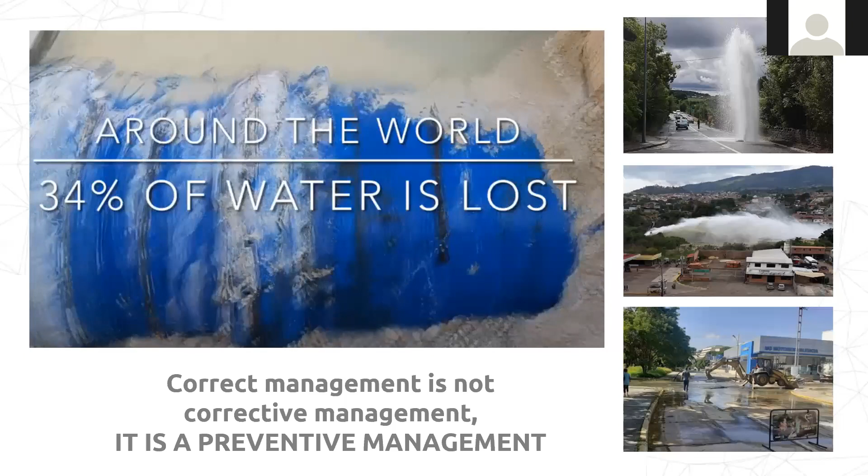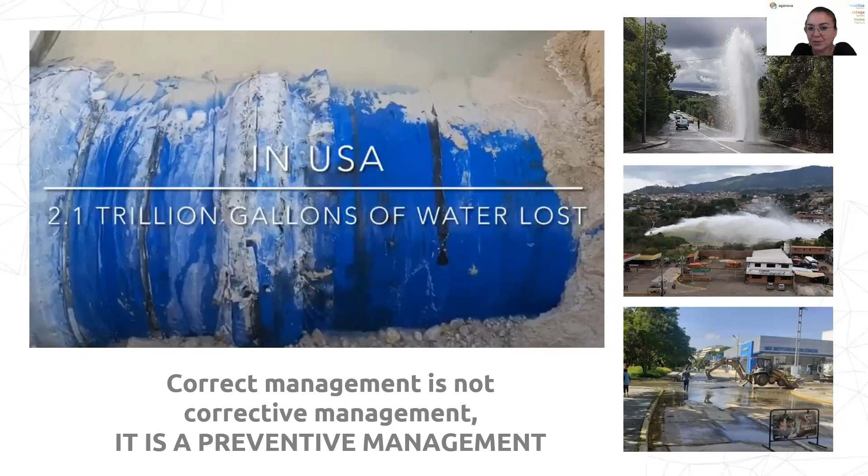Okay, I think this slide is not really necessary for all of you because you are leak detection specialists, but I always like to introduce my presentation explaining that when we speak with clients, they always evaluate leaks as per the quantity of water that we are losing. But the amount of water we are losing through leaks is one of the minimum risks of a leak.

There are a lot of consequences from not having a correct management of the pipeline, of the assets. Because one leak is the beginning of a problem, but then a leak could cause major problems such as damages of the pipeline, service cuts. So it is very important for our company to let the sector know that correct management is preventive management, not corrective management.

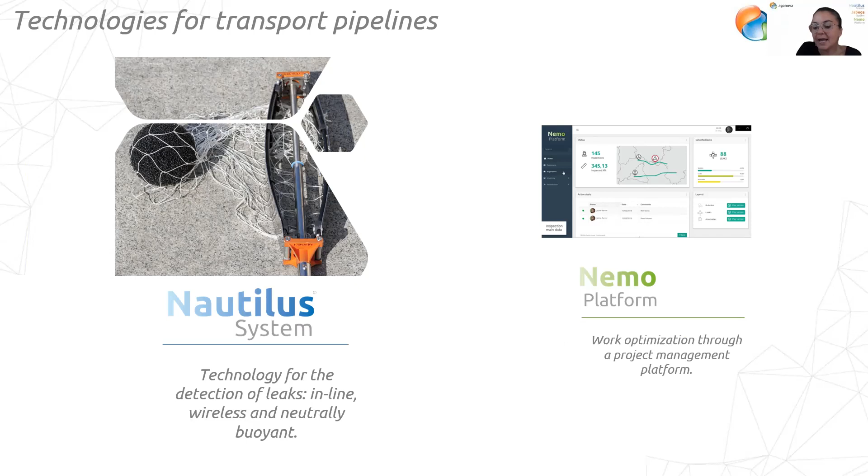Today, I'm going to introduce you the Nautilus system, which is our inline technology for leak detection in big diameter pipelines, and the NEMO platform, which is the way in which we share the inspections and results with the clients. It is a working environment developed by Aganova as well, and I will explain later. Okay. So let's focus on Nautilus then.

Sorry. No. You just interrupted. So I'm going to translate the last bit. And you can start from Nautilus because there are also some interruptions.

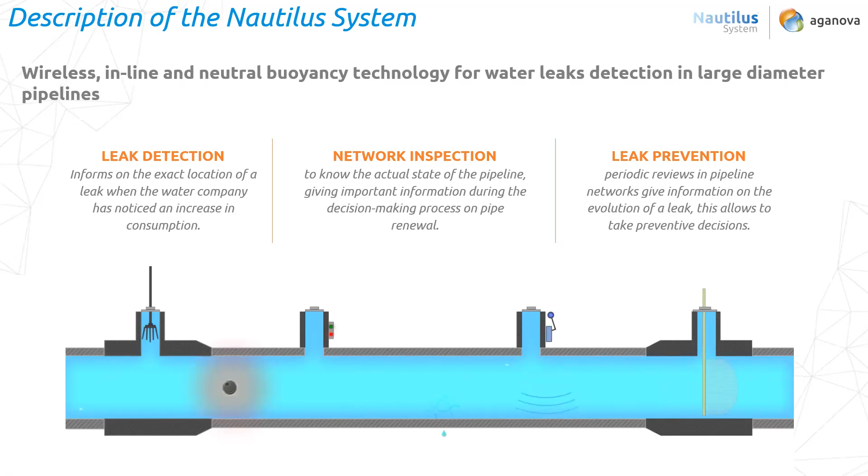Okay, now, one second. Now I'm going to explain the most important key points of the field inspection, how we insert the sphere and how we extract the sphere. But before, I would like to highlight here a few features of our system. First of all, it can inspect up to 35 kilometers in one insertion. The number of kilometers we can inspect depends on the water speed. So if the water speed is very low, probably we will have to separate the section.

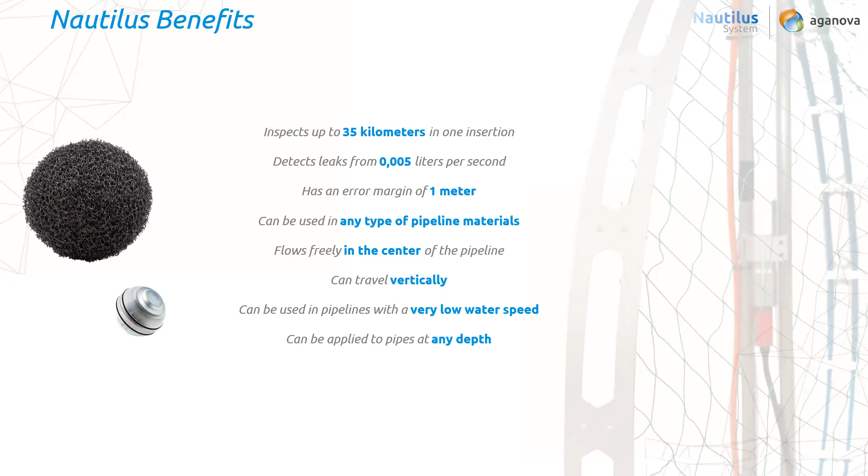Okay, let's review here the minimum requirements we need to be able to make an inspection with Nautilus. As I mentioned before, we need a minimum flow of 0.2 meters per second. And a maximum, it varies on the diameter of the pipeline.

The thing with velocity in our system is that, as you can see here, the net with which we collect the sphere is formed of two flanges that are introduced in the pipeline together. So if the water speed is very high, the flanges could flow with the water. So maximum velocity would be around 1.5 meters per second, but it will depend on the diameter of the pipeline. So it could be higher speed also. Synchronizer. Okay.

Sorry, Ana, let me just briefly translate. Sure.

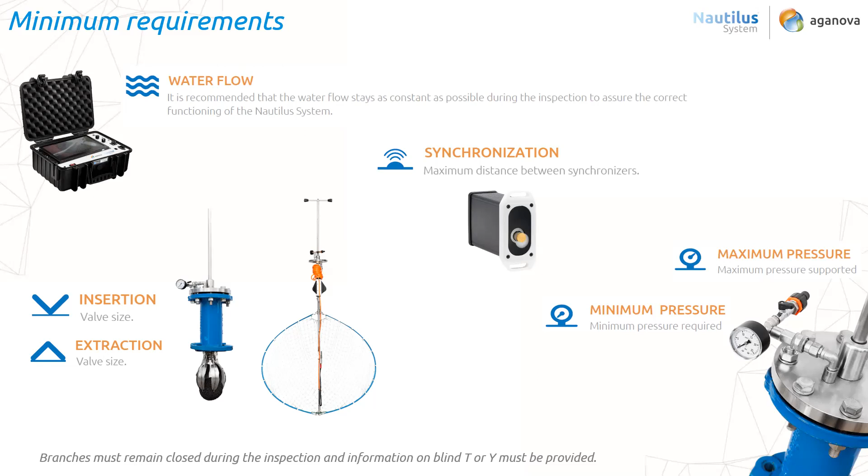Okay, now I'm going to explain how we can insert and extract the sphere. For insertion, we need an operative gate valve of a minimum diameter of 80 millimeters. This gate valve must be vertical.

So Anna, if it's possible, I will ask you to guide us step by step for each process, and I will translate each step because I think this part could be more complicated to understand. Is that okay?

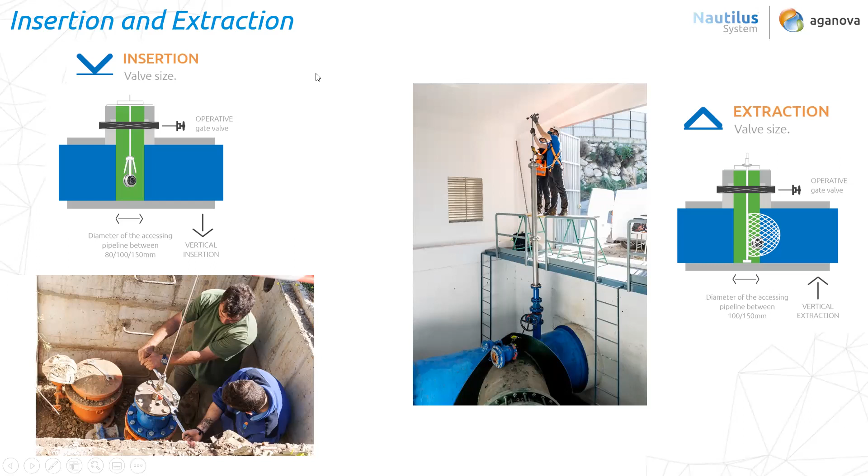Yeah, and basically I would like to stop here because I have done the whole technical explanation of how it functions, insertion and extraction. Probably it's good if you want to ask questions about what I have explained so far, and then I can continue with the examples of work we have done. Okay, I will ask.

There are already some questions in the chat box, so I will just read them to you in English and maybe a very brief translation in Romanian. One question is about whether water temperature or ambient temperature could influence this activity, and what is the minimum diameter for the sphere to be introduced - I mean, can it be introduced through a hydrant or not. So this is one question with multiple questions inside.

So the first is whether the water temperature has any influence. No, it hasn't. The water temperature has no influence, not the water temperature, not the ambient temperature. So none of them.

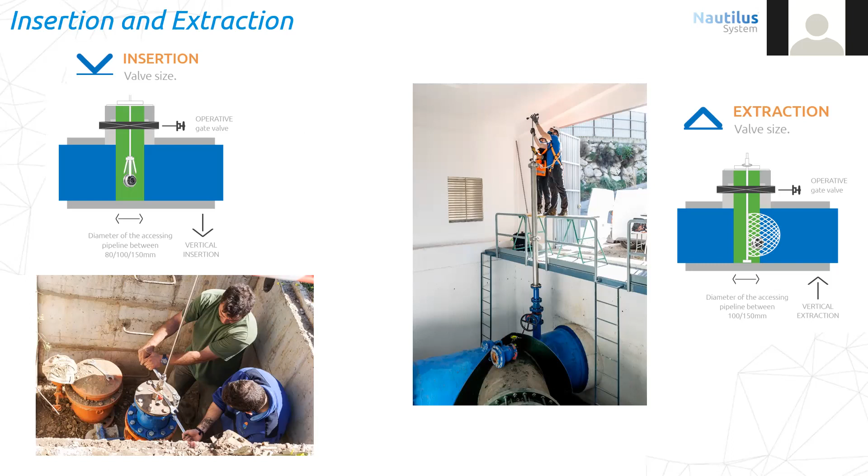Yeah, exactly. A couple of considerations: the cost of the service depends on the number of kilometers that are going to be inspected. It will not be the same price if we have to make an inspection in Romania of 2 kilometers versus 100 kilometers. A second consideration for pricing is that normally one inspection of one section takes 1 working day, so the more sections the pipeline needs to make an inspection, the higher the price. To have an average, you can consider a minimum price of 1,500 euros per kilometer, up to 5,000 euros per kilometer when we have small sections to be inspected.

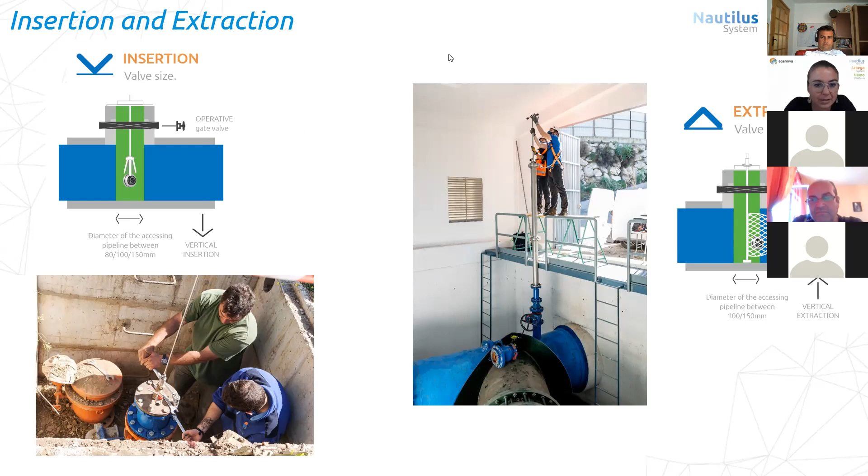Okay, so I'm going to continue, but I think I have to make one. Yeah. Okay.

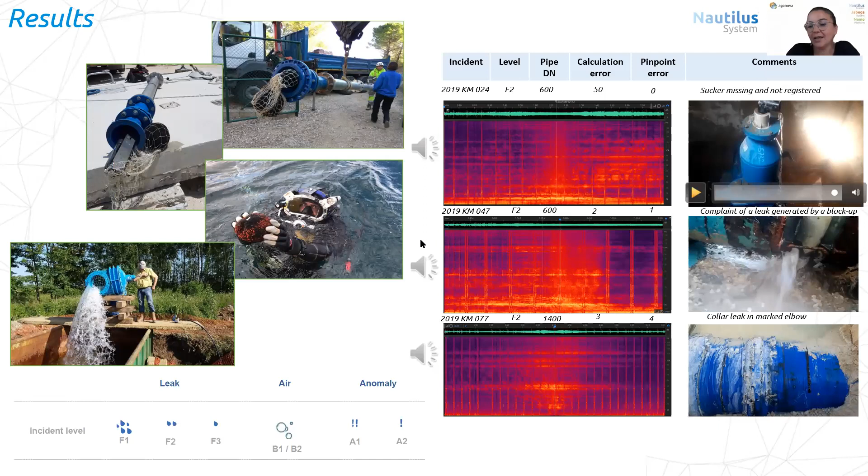So with regards to results, let me share with you one example of what we detect when we detect a leak. What our system does is compile the acoustic information with the help of a software that helps us see the shape of the spectrograms of the recording, let's say, of the sphere, and then we can determine the size of the defect and also calculate where the leak is located.

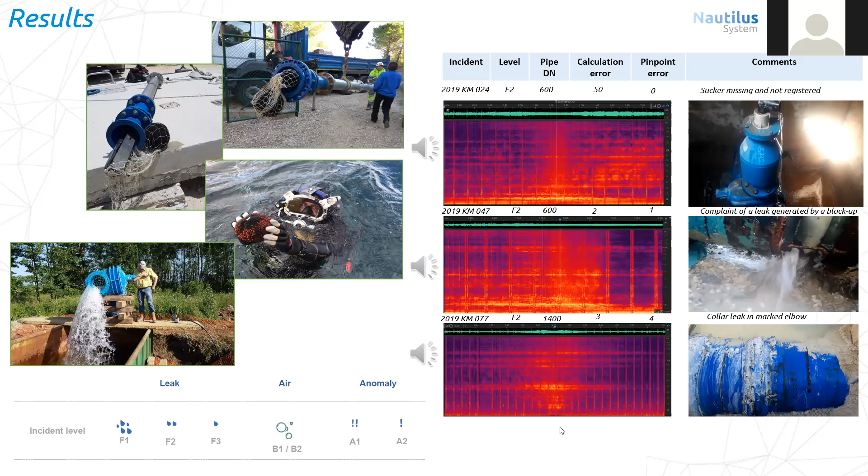Let me just explain here this, and I will go back later. The working methodology of the Nautilus system, as I mentioned at the beginning of my presentation, is through the NEMO platform. This NEMO platform has been developed by Aganova, in order to get in the general stream of the sector of digitalization. So before, we used to make inspection and deliver a PDF report with the geolocalizations of all leaks and anomalies. Now we use this NEMO platform, which is used for planning of the works, for the execution, so the client can see all the works that are taking place, and also to share the results of our inspection.

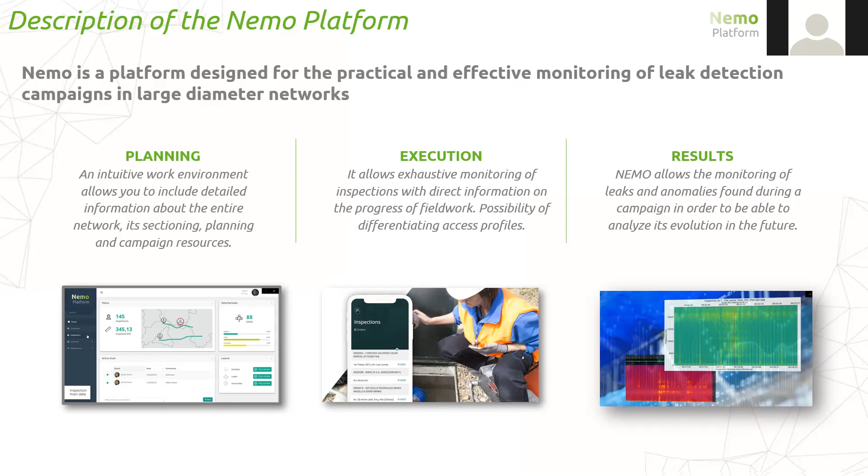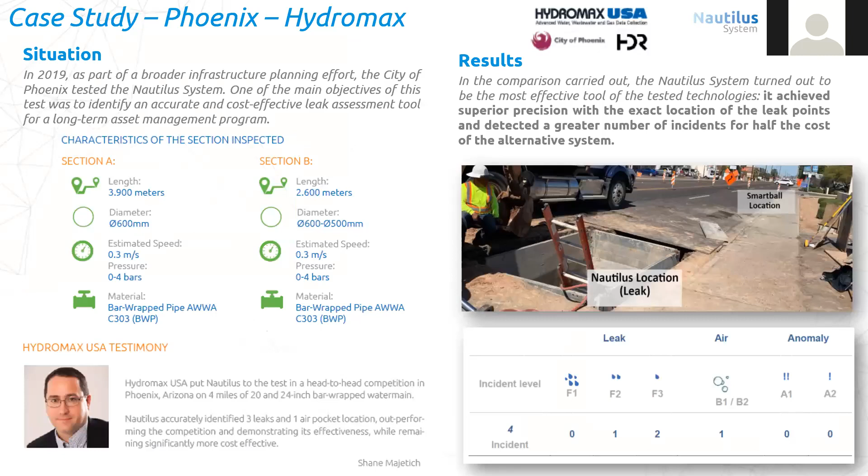Okay, I follow. Okay, I translate. Okay. This also was the first job we did. Okay. Sorry, no. Continue. Then continue if you can, and then you just tell me when I have to translate.

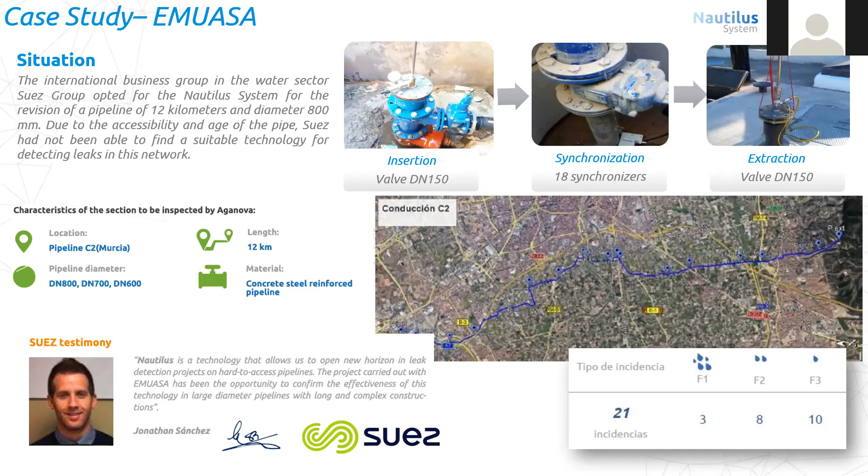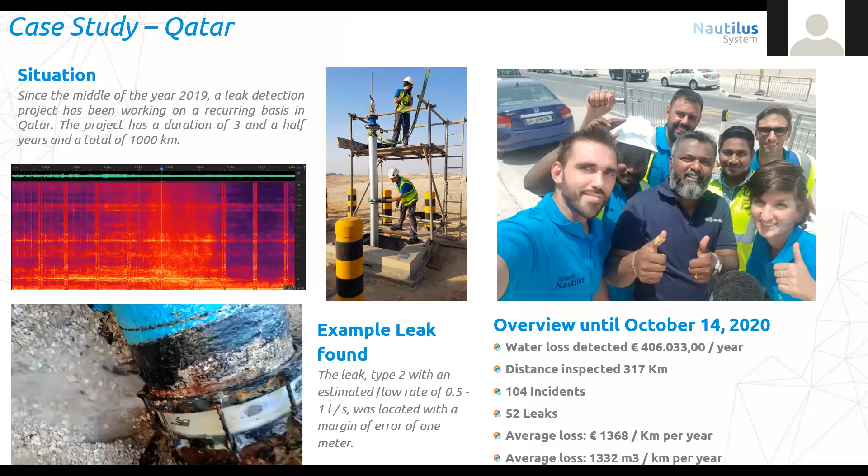And basically, when we are working on a permanent basis in one country, we collaborate with an international network of partners. So we have partners in each country that help us to develop the service both in the commercial way and also in the technical way.